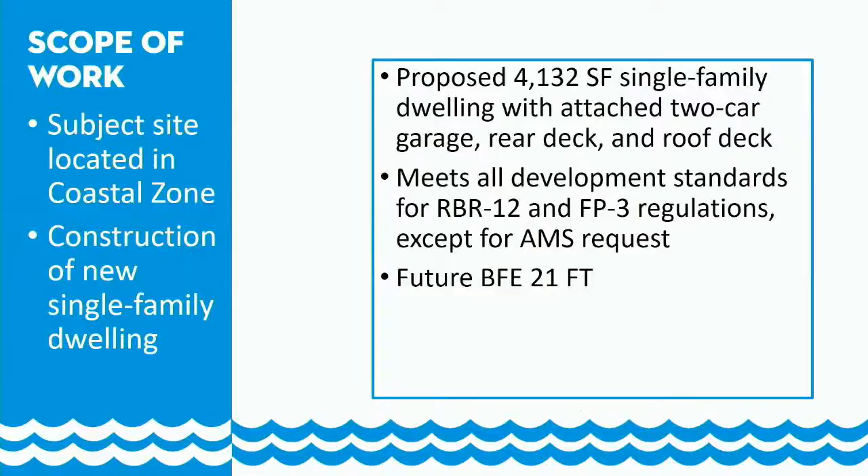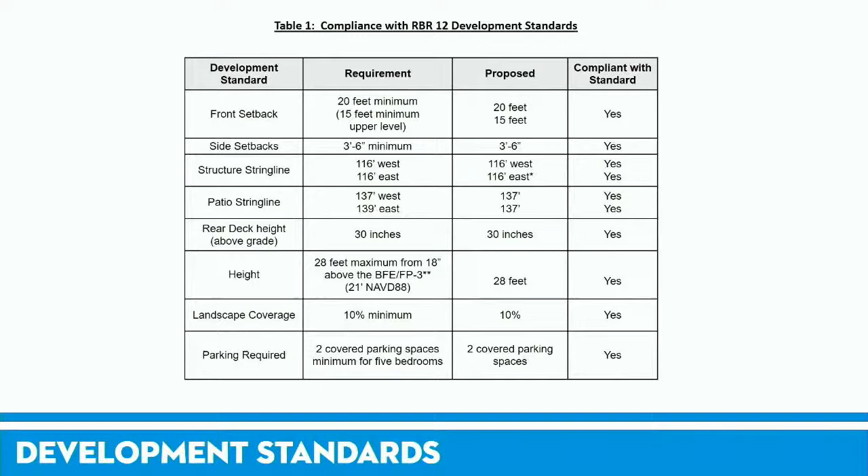Here we have all of the applicable development standards for the project for the RBR 12 zoning. It meets all the necessary setbacks, including front, side, structure string line, patio string line, as well as the necessary height, landscaping, and parking.

Here we have the overall site plan for the development. As you can see, it meets all the necessary front, side setbacks. We have the structure string line here highlighted in red, as well as the patio string line in green. Highlighted in red is the requested projection of the 3 foot for the landing and stairs to project beyond the structure string line.

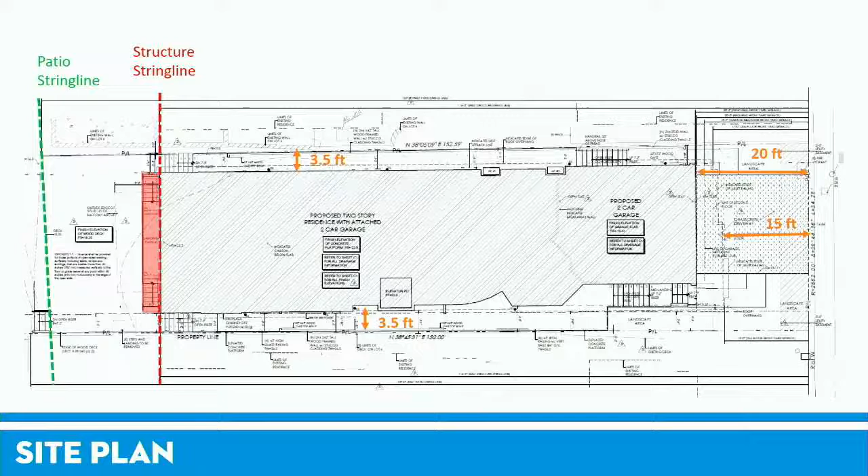Here you have the front and rear elevations illustrating the modern farmhouse design with the stucco siding, metal standing seam roof, and the modern detailing that you can see here. Highlighted in green, we have the future base flood elevation of 21 feet. As you can see, all of the habitable area is elevated above that, with the exception of the garage, which is non-habitable, is located at grade and does comply with the required 28-foot height requirement.

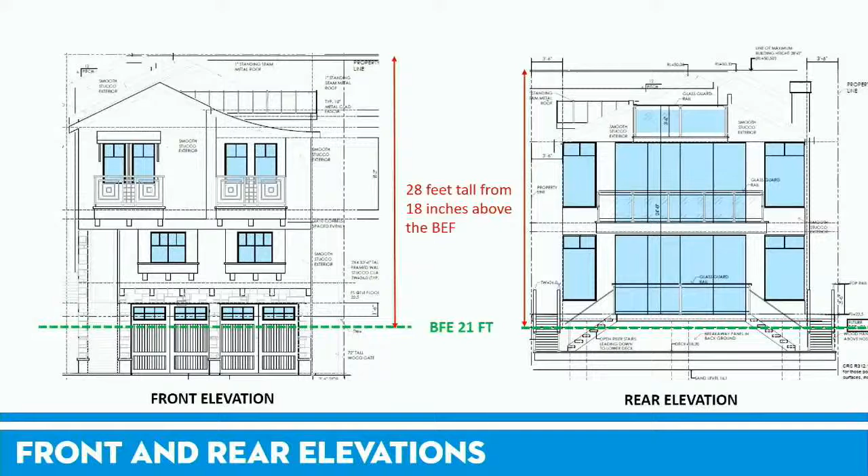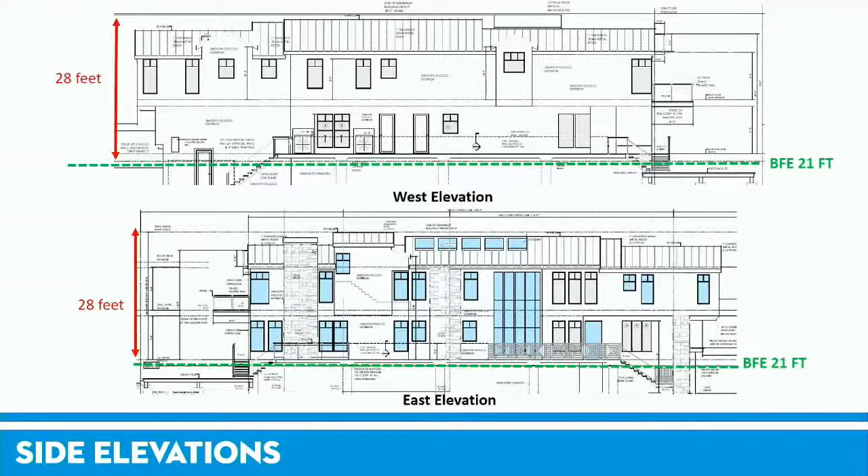Here we have the east and west elevations, again illustrating compliance with the height and base flood elevation. Here you can see the seaward deck along the east elevation and west elevation in compliance with the maximum height of 30 inches above the average pre-graded elevation of the structure string line.

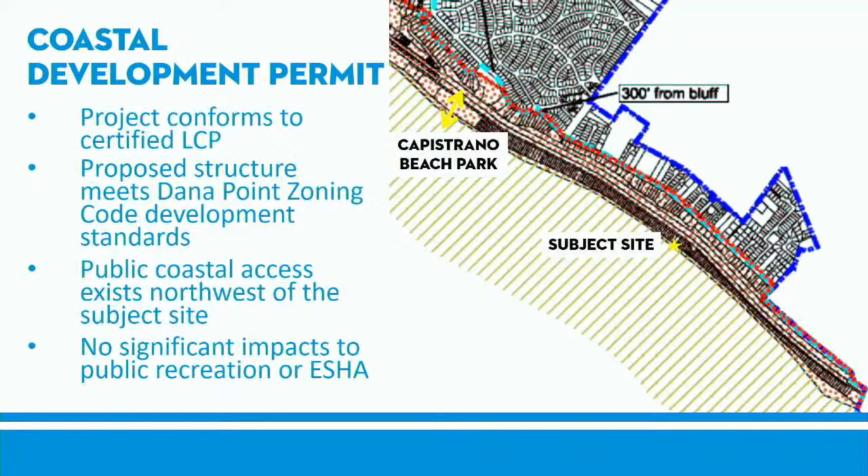Coastal development permit requirements require the project to be evaluated for compliance with the city's zoning ordinance development standards, as well as evaluating public access and any impacts to environmentally sensitive habitat. Given that Capistrano Beach Park is located to the north, there's sufficient public access for an exemption of any access easement, as well as Poche Beach located at the southern portion.

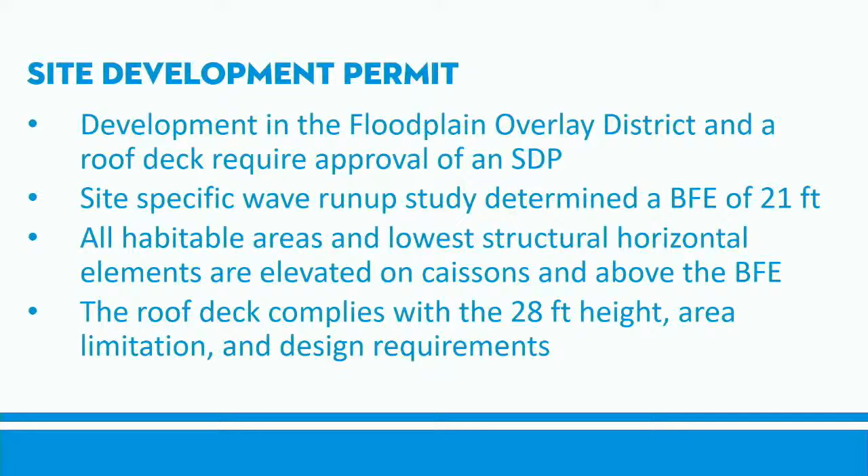A site development permit is requested for all development located within the floodplain overlay, as well as for the requested roof deck. Regarding the floodplain overlay, a site-specific wave run-up analysis was completed and reviewed by the city's third-party coastal engineer to determine that the future base flood elevation of 21 feet is appropriate for the proposed development, ensuring that over the 75-year life of the development, the project would be safe from flood and storm action. The design ensures it's located on caissons, with all habitable areas and the lowest horizontal element of the structure elevated above that 21-foot future base flood elevation. As for the roof deck, it is in compliance with the necessary height standards, the area limitation is under 300 square feet, and it meets the design requirements.

Regarding the administrative modifications of the standards, that's requested for the stairs and landing to the seaward deck. Given that the seaward deck has a code limitation of a maximum of 30 inches above the average existing pre-graded elevation of the lot, and the competing elevation requirement for the habitable area to be located above the base flood elevation of 21 feet, there results in a delta of 4.3 feet for the residents to travel down to the deck. This creates a practical difficulty in the design, in that addressing it would impact the allowed buildable area for the home. So that's the requested encroachment of 3 feet.

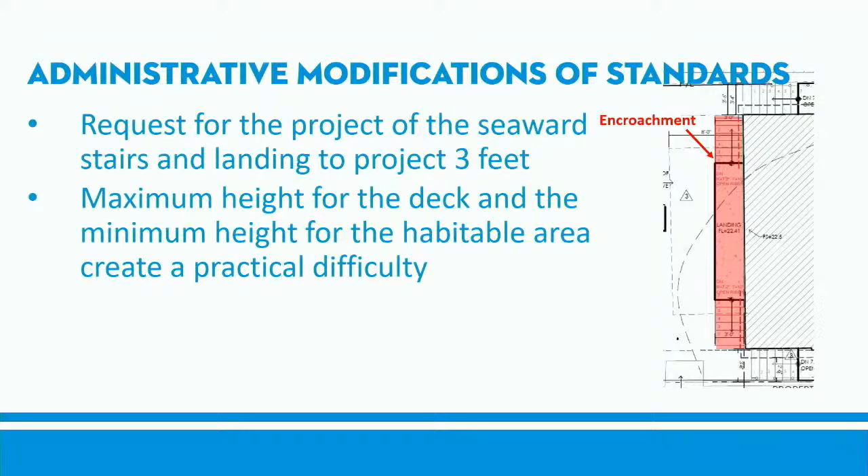Staff has reviewed the project and the design, and it does comply with the city's local coastal program as well as the zoning ordinance, and is thereby in conformance with the Coastal Act and all necessary findings associated with the coastal development permit, site development permit, and administrative modifications to the standards. Therefore, staff is recommending approval of the application before you today. Staff and the applicant are available for any questions you may have.

Thank you. Commissioner, questions for staff? I don't have any.

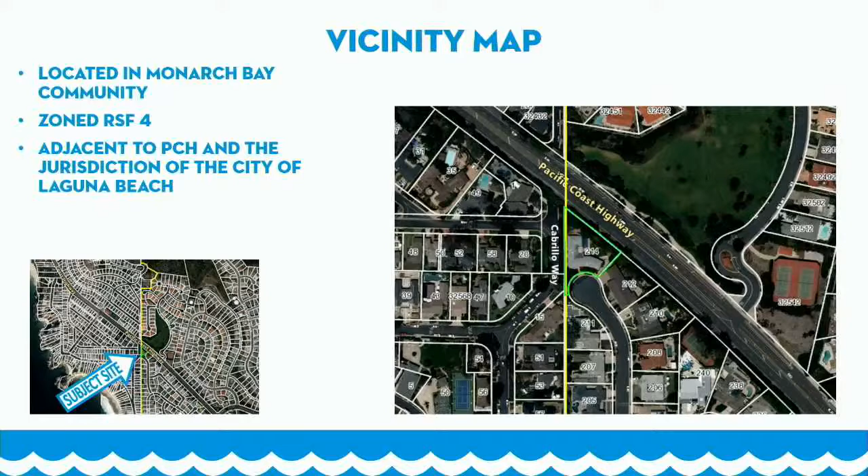Here we have the vicinity map for the project. The project site is located within the Monarch Bay community. The underlying zone is residential single family 4, and the subject site is located within the coastal appeals jurisdiction. Adjacent land uses are existing single-family dwellings. You will see in the vicinity map that to the west portion of the property, this area borders the jurisdiction of the city of Laguna Beach, as well as the Pacific Coast Highway.

Here we have some existing conditions. Currently there's an existing single-story, single-family dwelling with a pool and garage. The existing dwelling, pool, and garage are all to be demolished for this new structure to be constructed on the site.

Entitlement permits required are a coastal development permit, as the site is located within the Coastal Overlay District and the appeals jurisdiction of the California Coastal Commission. A minor site development permit is also required because the project is proposing retaining walls as high as 6 feet located on the sides and rear of the property.

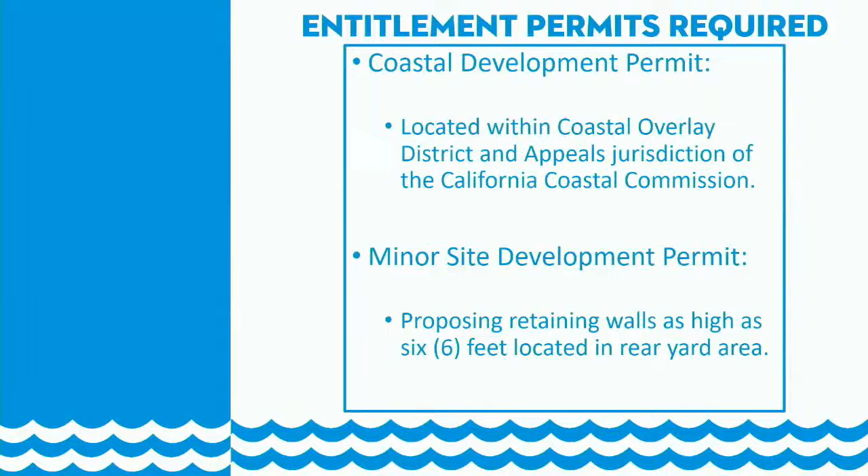Here we have the site plan, demonstrating the orientation of the structure on the site. The proposed project is a 2-story single-family dwelling, 5,257 square feet cumulatively between both stories. Also proposed is a 3-car attached garage and related improvements. You'll also see in the front yard area there's a pool and spa, which will be issued under separate permits.

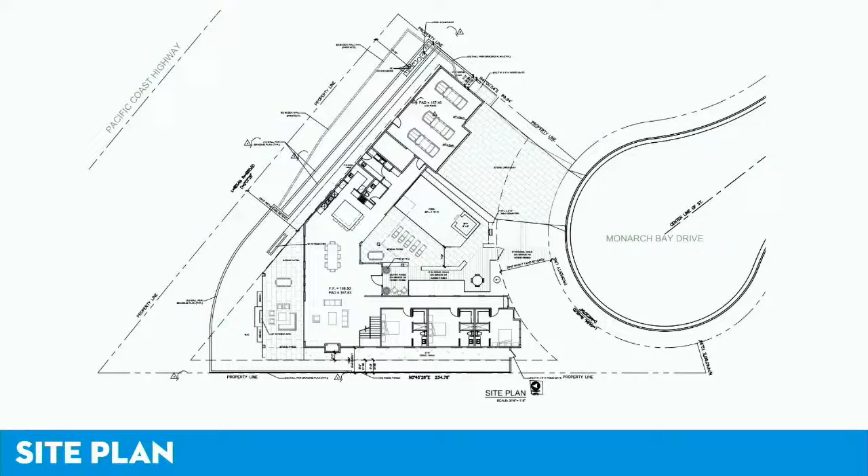This is the lower level floor plan. This level of the house basically contains a kitchen, laundry room, a 3-car attached garage, dining room, family room, as well as 3 bedrooms and 3 bathrooms.

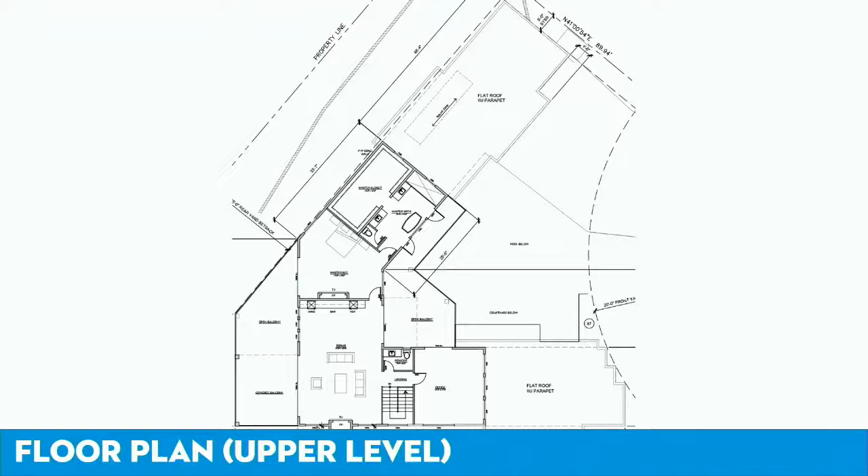Moving on to the upper level floor plan, we have the master bathroom and bedroom, as well as a bonus room, a powder room, office, and a 2nd-story balcony that projects off the rear of the property, in the rear yard area.

Here are the elevations for the proposed single-family dwelling. The maximum height of the structure as measured from existing grade will be 23 feet up to the flat mansard-style roof. The architectural style of the residence resembles mid-century modern and utilizes exterior materials such as stone veneer and stucco.

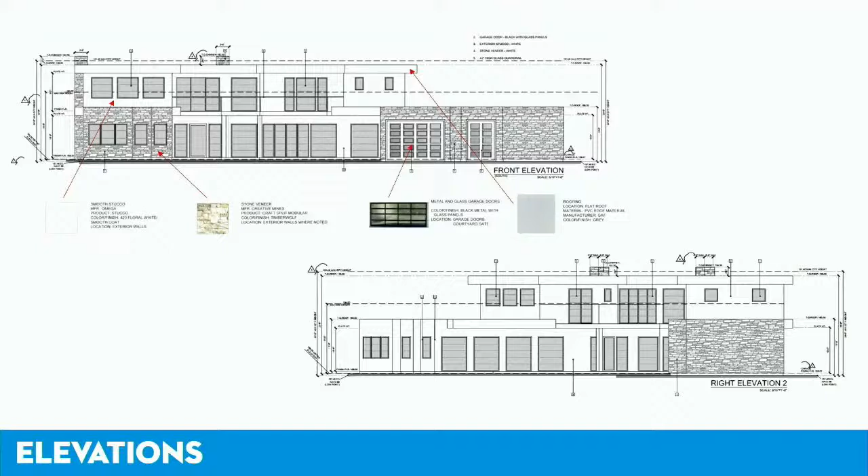These are just some other elevations from the left and right-hand side of the proposed dwelling unit.

This is the development standards table that I've compiled for residential single family 4, demonstrating the project is in compliance with all of the development standards of the residential single family 4 zoning designation.

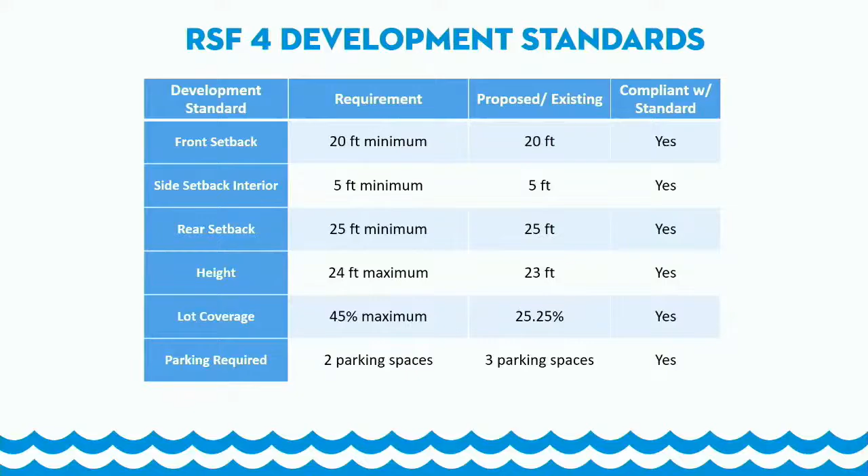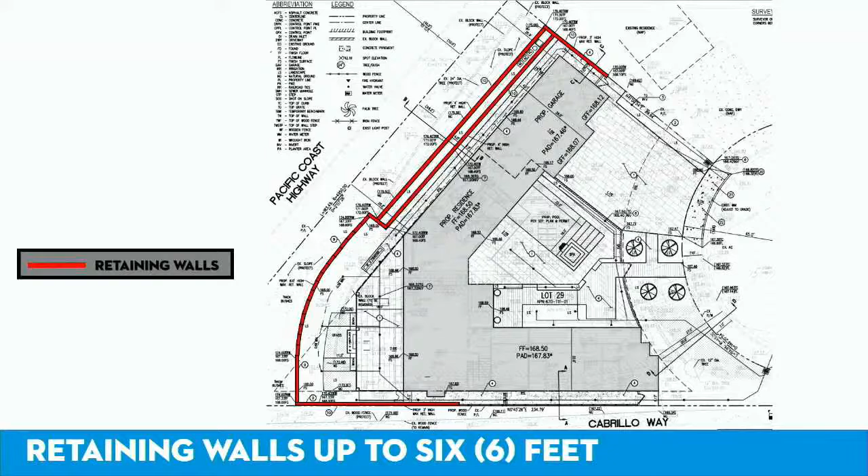In conclusion, the project meets all applicable development standards and the underlying zoning designation. The project has obtained Monarch Bay HOA approval and meets all the findings for a coastal development permit and site development permit. Planning staff recommends that the planning commissioners adopt the draft resolution approving coastal development number 21-4 and site development permit 22-15. That concludes my presentation. I'll answer any questions at this time.

Thanks, Justin. Commissioner questions? No, none?

With that, we'll open the hearing up for public comments, if there are any.

Thank you. My name is Jared Evans, I'm the property owner. I just want to thank the staff for your hard work and support throughout this project. To the best of my abilities, I'm happy to answer any questions you have, but otherwise appreciate your time.

Thank you very much. Any questions for the applicant? All right, with that I will close the public comment and bring it back to the commissioners for discussion.

I'll go first. I visited the site. It's the location on a corner there, or in the cul-de-sac with PCH in the back, which creates a couple of challenging conditions. Based on my review of the project, the plans, and visiting the site, knowing the area, this project is well designed. It's totally consistent with our local coastal plan. When you look at the adjacent topography, it makes sense why we've got retaining walls. Totally consistent with the community, and the site is designed well and is appropriate for the project. So I'm fully on board and willing to offer up a motion.

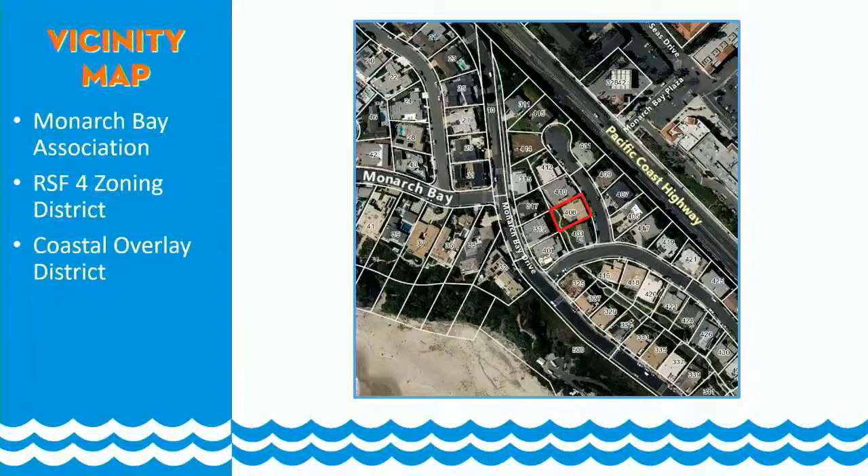Due to the scope of the proposed project and the site's location in the appeals jurisdiction of the California Coastal Commission, a coastal development permit is required. Additionally, a minor site development permit is required for the proposal of several retaining walls and a retaining site wall that are over the city's height standard.

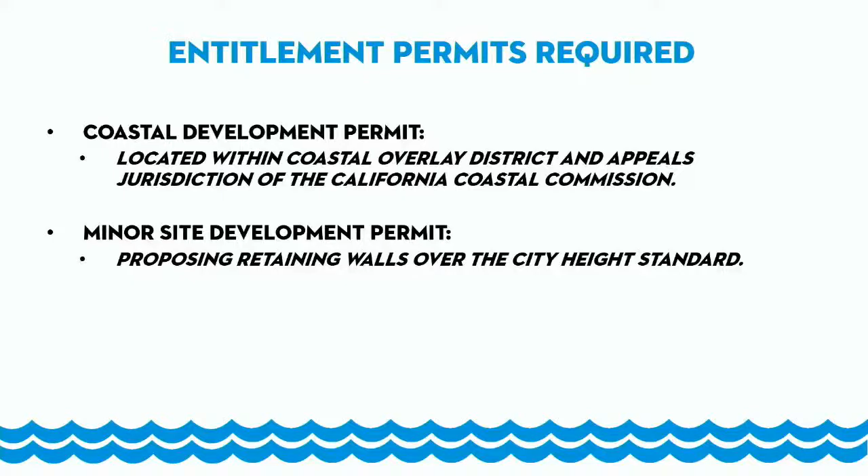So again, the applicant proposes to demolish the existing single-family dwelling and detached garage and construct a new 2,527 square foot single-story, single-family dwelling with an attached garage. Here's the proposed floor plan; it contains 2 bedrooms, 2 offices, and a common living, dining, and kitchen space.

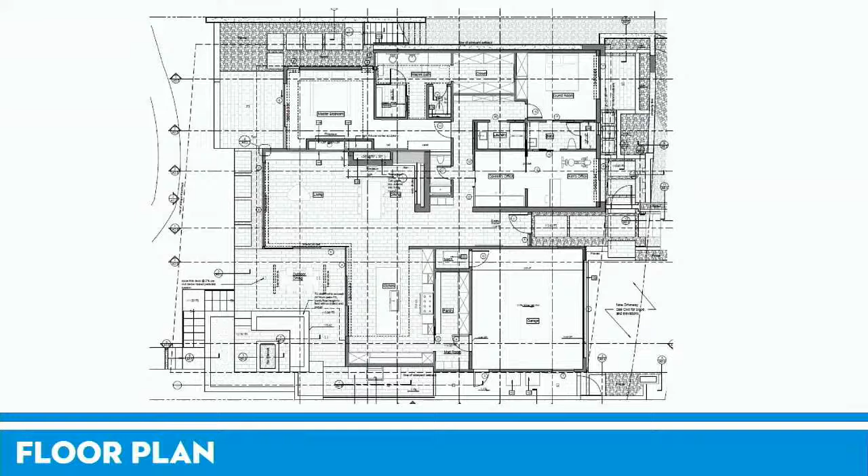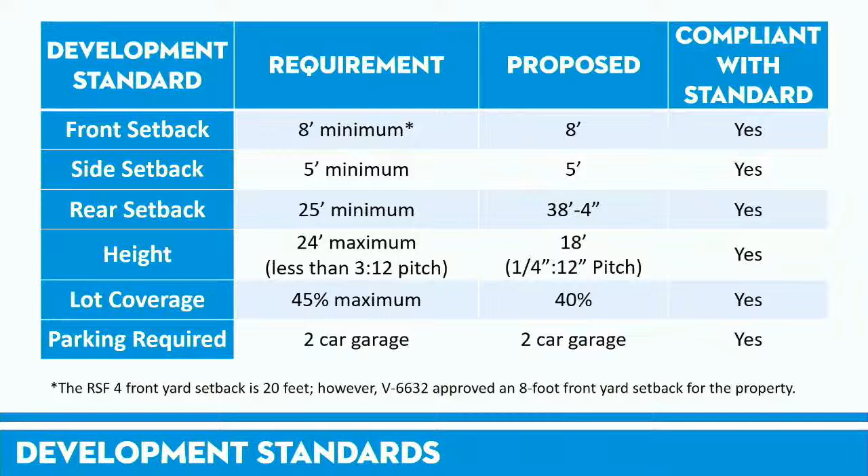The project complies with all applicable development standards, including setbacks, lot coverage, parking, and height limits. As you can see from the front and rear elevations, the dwelling incorporates elements of contemporary architecture, such as a built-up flat roof, large glass windows, and an open floor plan, and incorporates various exterior finishes indicative of this style, including smooth stucco, limestone veneer, and wood siding.

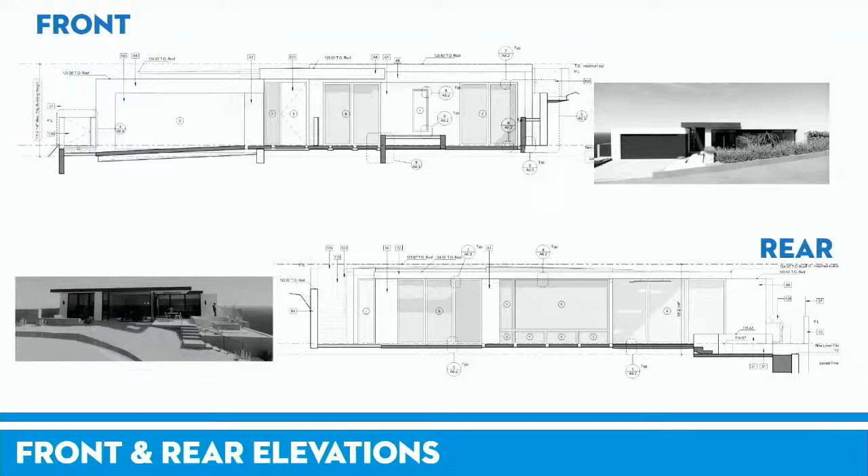The applicant also proposed exterior improvements that include an outdoor dining area, fire pit, and patio area, which you can see through these north and south elevations.

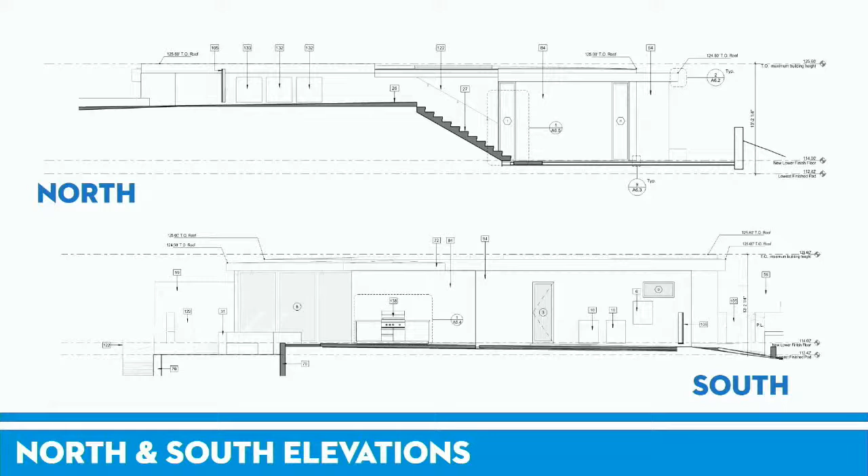The overheight retaining wall in the front creates outdoor patio space and is about 5 feet facing the subject site. To the north of the property, there is an overheight retaining wall and an overheight retaining site wall. The overheight retaining site wall adjacent to the property line has an overall height of about 8 feet; however, due to the topography, the maximum exposure to the adjacent neighbor would be 5 feet. The second overheight retaining wall faces the communal walkway known as the mall and has a maximum wall height of 5 feet facing the subject site and a maximum exposure of 2 feet facing the mall.

Lastly, to the south of the property, there is also an overheight retaining wall and an overheight retaining site wall. The overheight retaining site wall adjacent to the property line has a maximum wall exposure of 6 feet at the rear of the property.

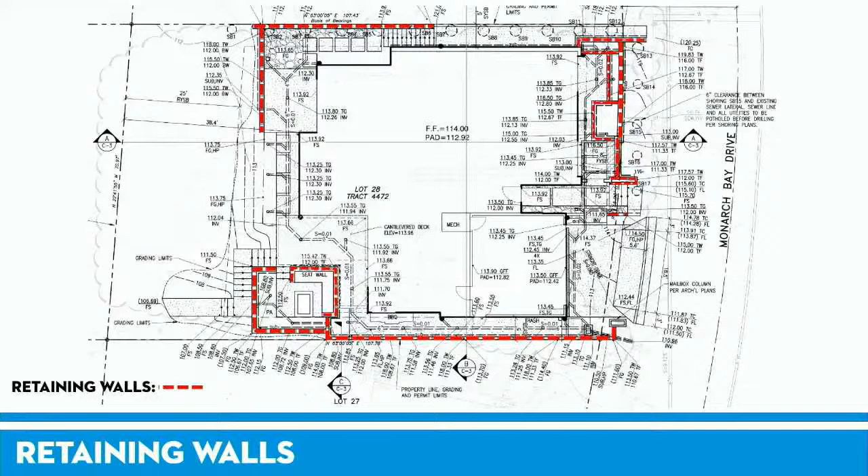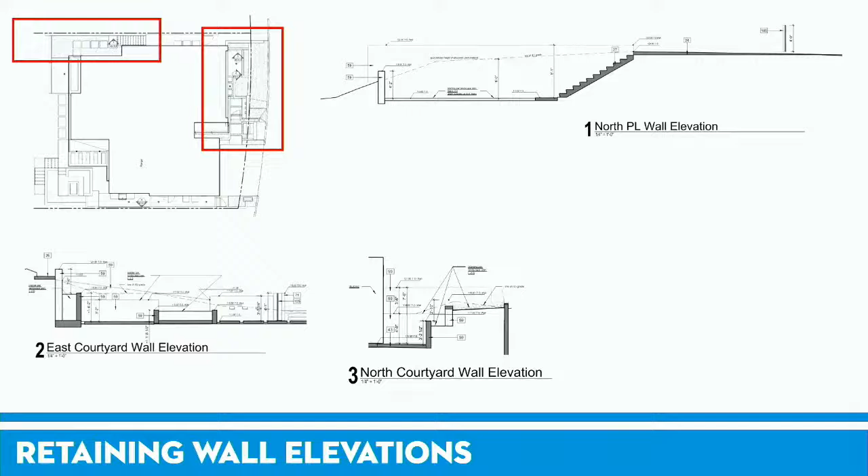This wall is also comprised of a concrete wall and a glass screen on top. The second overheight retaining wall, which faces the mall, has a maximum exposure of 5 feet. This slide contains elevations of the proposed wall heights as they face the subject dwelling. Additionally, the finished materials of these walls match the proposed dwelling.

To conclude, the applicant has received approval from the Monarch Bay Association's Architectural Review Committee, and the project meets all applicable development standards. Therefore, staff recommends that the Planning Commission approve CDP 22-0003 and minor SDP 22-003, subject to the findings and conditions included in the draft resolution. Thank you for your time, and I can answer any of your questions.

Great job, thank you. I will open it up for commissioner comments or questions. No questions? Right, you did a good job. Thank you, that was a little nerve-wracking, first time.